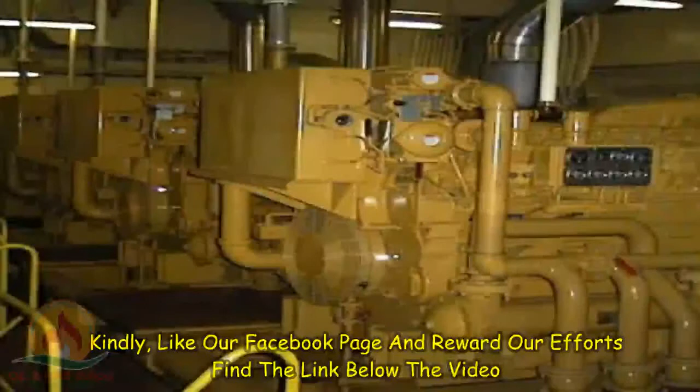There are three basic ways a rig distributes or transmits power: an AC to DC power system, or SCR power system, a DC to DC power system, and a mechanical power system.

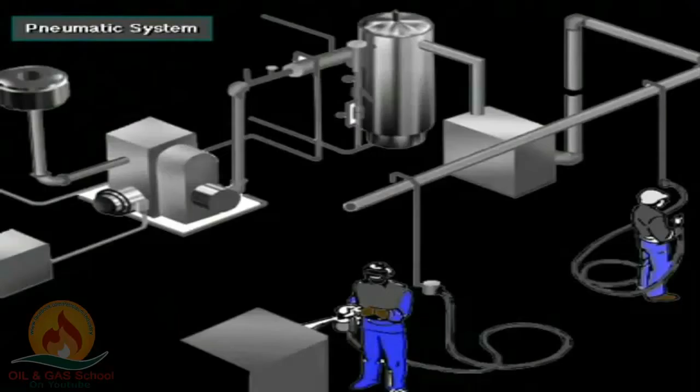At the heart of every rig power system, whether electrical or mechanical, is the prime mover, the rig's main source of power. Most rigs have more than one prime mover, and prime movers are almost always large internal combustion engines. Some equipment on the rig requires hydraulic power and pneumatic power. The rig's hydraulic and pneumatic systems also obtain their power from one of the three basic distribution systems.

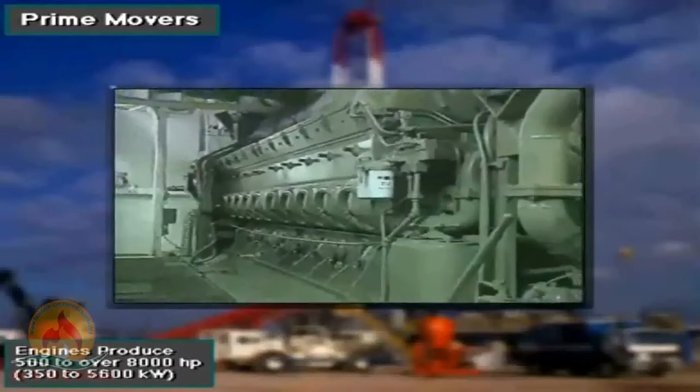Large diesel engines are the main power source, the prime movers for most rigs. These engines often produce from 500 to over 8,000 horsepower, or 350 to 5,600 kilowatts. Rig builders usually house several engines together to drive the rig equipment. They also keep extra engine sets available for backup operations.

Most rig engines are diesel because, unlike gasoline engines, they can produce a lot of power when running slow. Also, diesel fuel is not as volatile as gasoline, so it's safer to use, transport, and store.

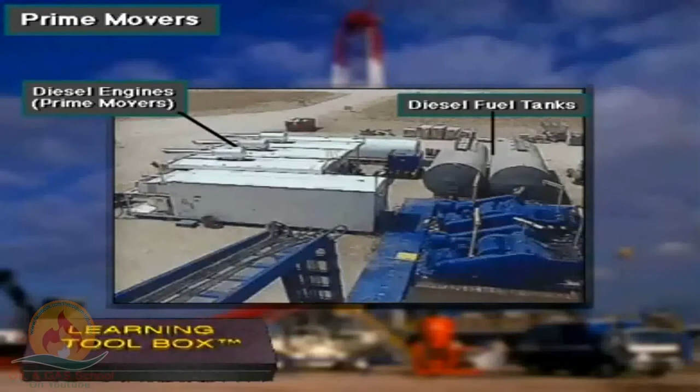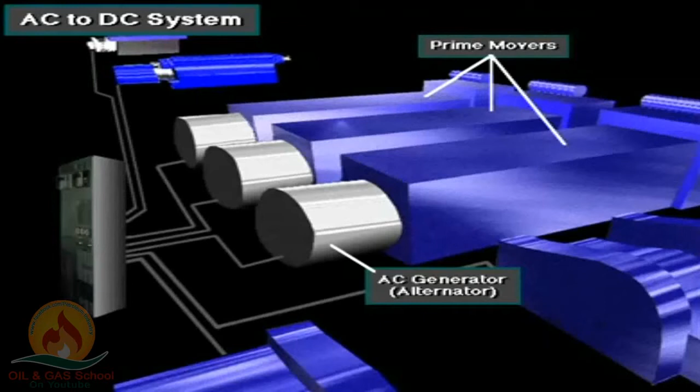Here's an AC to DC power system. The prime mover, usually a diesel engine, supplies power to the AC generator, also called an alternator. From the AC generator, AC current is sent to the SCR, the silicon-controlled rectifier. An SCR is a high-tech solid-state electronic device.

The SCR converts AC to DC current, which drives the heavy rig equipment, such as the mud pumps, the drawworks, and the rotary system.

Auxiliary loads, such as small pumps and rig lighting, need lower voltage AC power, so a transformer steps down or reduces the voltage to the rig's auxiliary electric equipment.

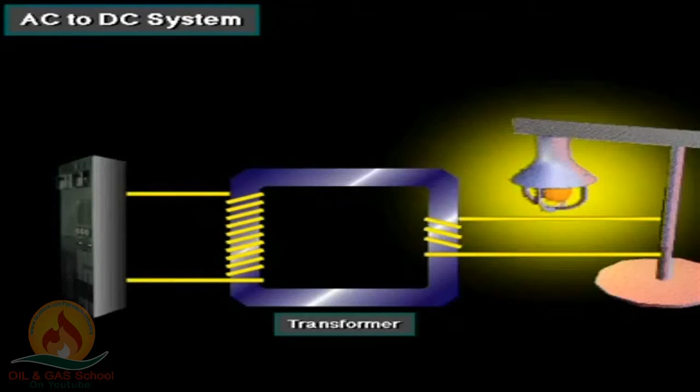The DC motors power the mud pumps, the drawworks, and the rotary system.

A smaller AC generator is also part of the system. It supplies AC current for equipment that works best with this current type. For example, a chemical mixing pump requires AC power.

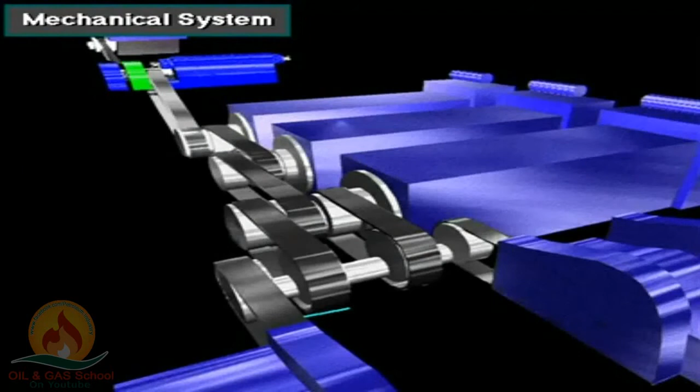Here's a mechanical rig system. Mechanically powered rigs are usually smaller than those rigs which use electric power.

The prime mover drives a mechanical compound transmission, which in turn powers the drawworks, the rotary table, and the mud pumps.

Auxiliary loads, such as small motors, are supplied with AC from an alternator connected to the prime mover.

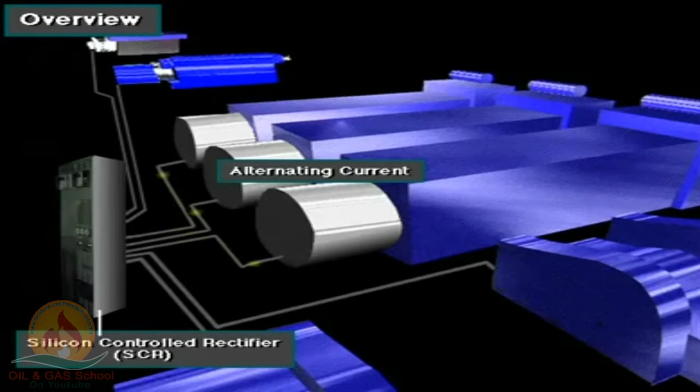Alternating current put out by the AC generators goes through heavy-duty electric cables to a special device called a silicon-controlled rectifier, or SCR. The SCR converts AC to DC.

Other heavy-duty electric cables carry DC electricity to the DC motors. The DC motors convert electrical energy back into mechanical energy to drive the powerful hoisting, rotating, and circulating equipment.

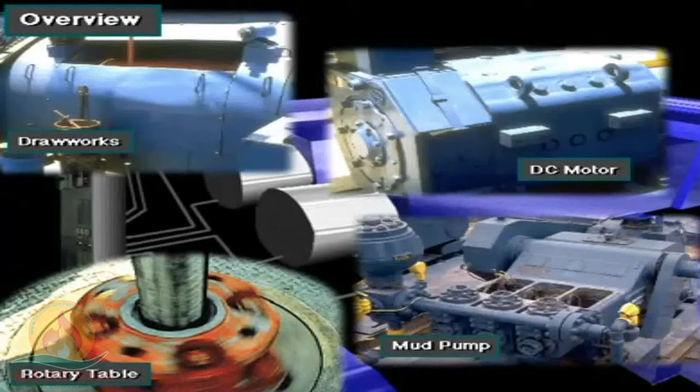Rig owners like to use AC generators because they can be built to be very powerful for their size, which is an advantage over DC generators. Also, rig equipment can distribute AC easier than DC.

But direct current has certain advantages when driving large equipment. Mainly, DC motors produce a lot of torque at low speed that the drillers can easily control.

Using remote switches on his console to control the SCR control panel, the driller can select and deliver the power from the various generators wherever it is required.

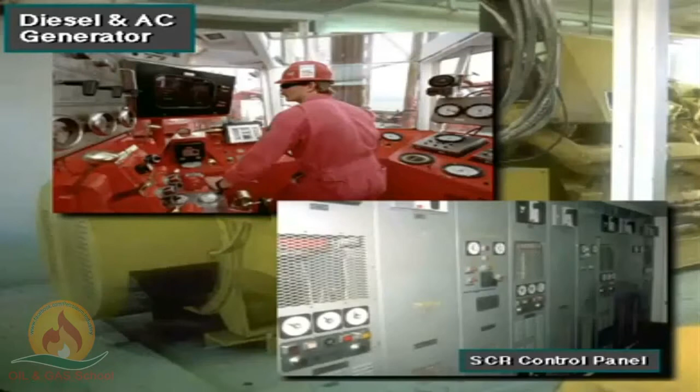But some AC generators power big motors. In fact, most of today's diesel-electric rigs use AC generators in a system called an SCR power system.

Here, a large AC generator, an alternator, is connected to the diesel engine prime mover. As the engine mechanically drives the AC generator, the generator produces alternating current, or AC electricity. AC is like the electricity used in most cities and homes.

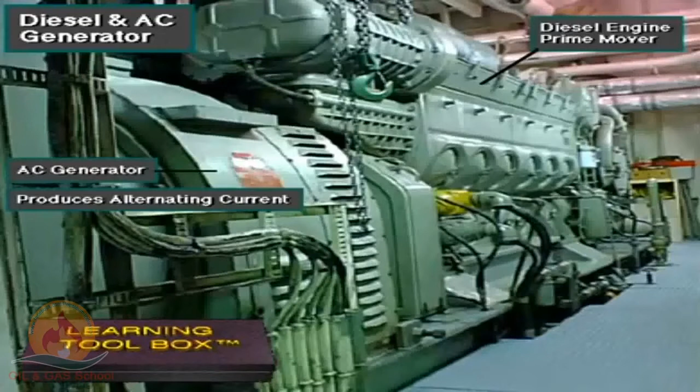Equipment in this electrical cabinet converts, or rectifies is the electrical term, most of the AC current produced by the AC generators into direct current.

As mentioned before, rig owners usually prefer DC current for driving the very large equipment that requires precise variable speed control and high torque. The control equipment includes solid-state electrical components called silicon-controlled rectifiers, or SCRs.

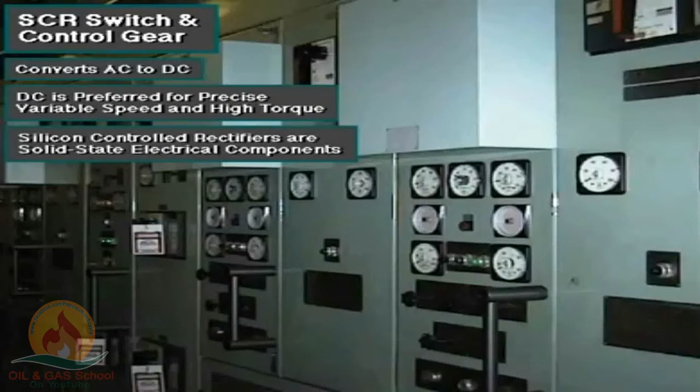Heavy-duty electrical cables come out of the cabinet and carry DC electricity to the powerful motors driving the circulating, hoisting, and rotating equipment.

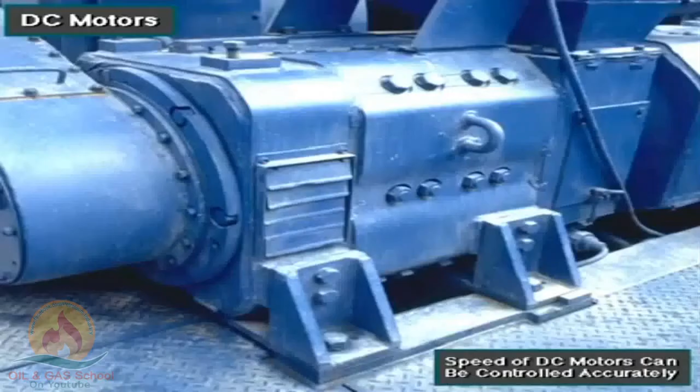Usually, large DC motors supply power to the mud pumps, the drawworks, and the rotary table or top drive. Sometimes the drawworks mechanically drives the rotary table, but on some rigs the rotary table has its own motor.

The driller can control the speed of a DC motor very accurately, which is why rig owners use DC instead of AC motors. With accurate speed control, the driller can accurately set the speed the drawworks lifts, the mud pump operates, and the rotary table turns on rigs without a top drive.

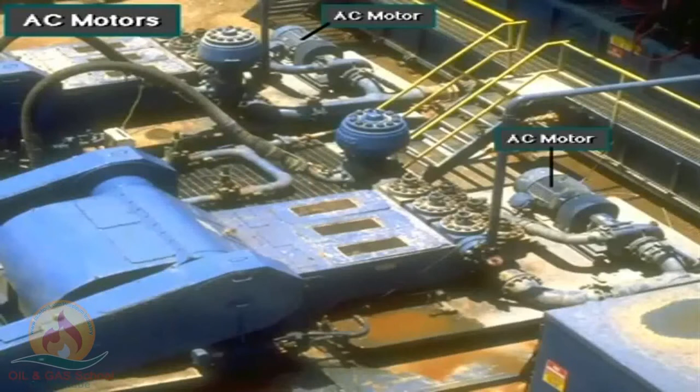Various small components on a rig need power too. For instance, these two centrifugal pumps move mud from a tank to supercharge the intake of the mud pumps. In this case, it's more efficient to use small motors to power the centrifugal pumps rather than using the prime movers, hydraulic fluid, or air.

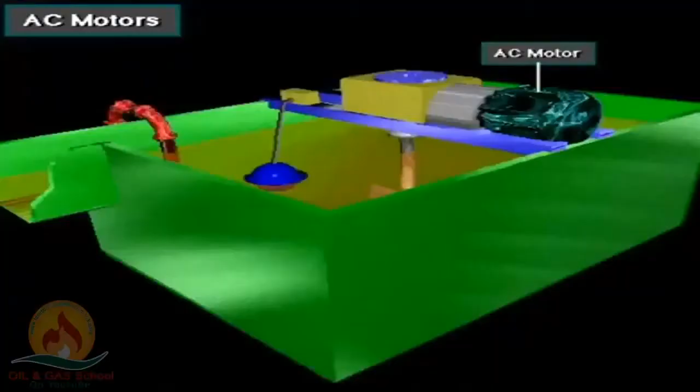Here's another AC motor. It powers the paddles on the mud agitator in a mixing tank. AC motors generally power equipment that does not require a lot of horsepower, so they vary in power from less than 1 horsepower, or 0.75 kilowatts, to more than 150 horsepower, 110 kilowatts.

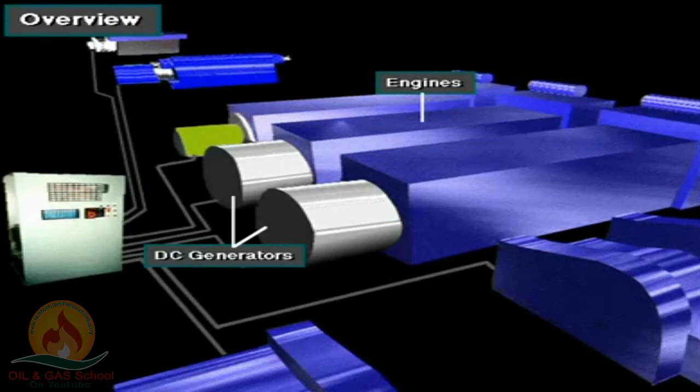For electric power distribution, some rigs use DC to DC power. DC to DC was the first electric power system. In a DC to DC system, each engine drives a DC generator. The DC generator converts the rotating mechanical energy of the diesel engine into DC electricity. Heavy-duty electrical cables carry DC electricity via the control panel to large 1,000 horsepower or 750 kilowatt DC motors.

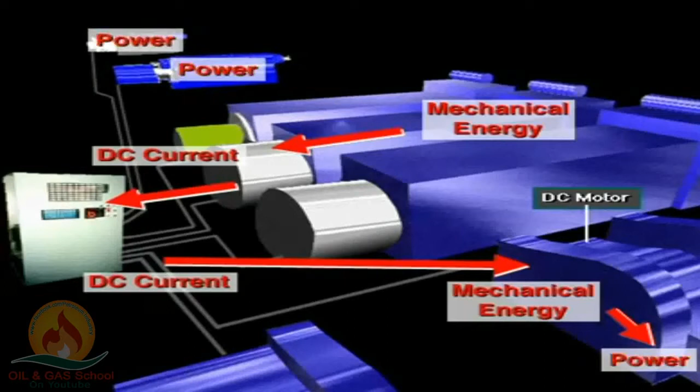The motors convert the electricity back into mechanical energy. This mechanical energy powers the hoisting, rotating, and circulating equipment. For large equipment, most rig owners prefer DC motors over AC motors.

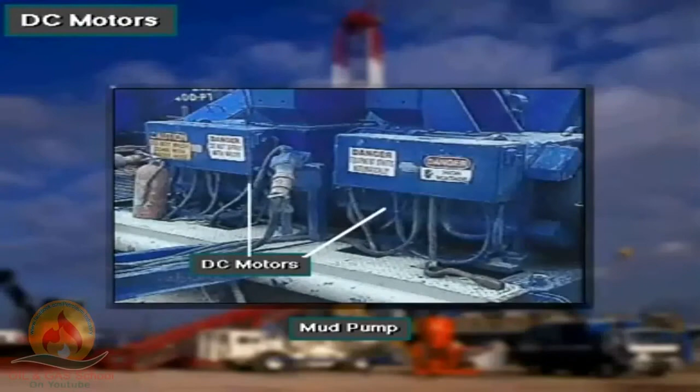DC motors put out high torque, twisting force at low speed. Further, the driller can easily control the torque from his console on the rig floor. Keep in mind, though, that recent technological advances are allowing computerized controls and variable speed AC motor drives to be used where only DC motors were used in the past.

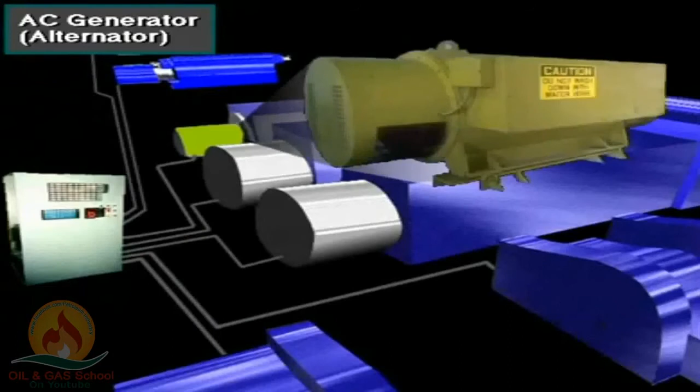This is a generator, or alternator, on a DC to DC rig. It generates the AC electricity that DC to DC rigs need. The alternator powers smaller equipment on the DC to DC rig, like the small AC motors on centrifugal pumps, air conditioners, lights, fans, water maker units, and other small equipment.

Mechanical drive rigs normally compound or connect two or more engines to drive the main pumping, rotating, and hoisting equipment. Generally, small to medium-sized land rigs use mechanical drives.

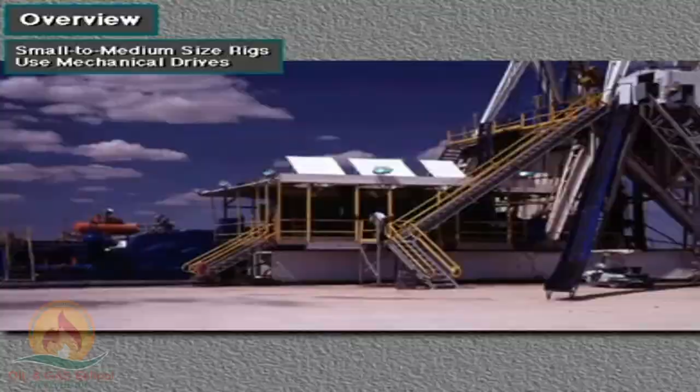They use clutches, converters, chains, shafts, belts, or compounding transmissions to connect the prime movers to the driven equipment.

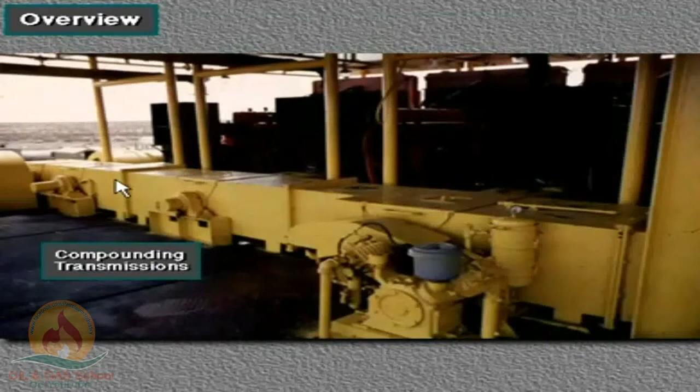Here's a common way to get power to the components on a mechanical drive rig. This shows 3 engines that the rig owner compounded. That is, the power from each engine goes through a series of sprockets and chains in a housing, called a compound. The compound transfers engine power to the drawworks, the rotary table, and the mud pumps.

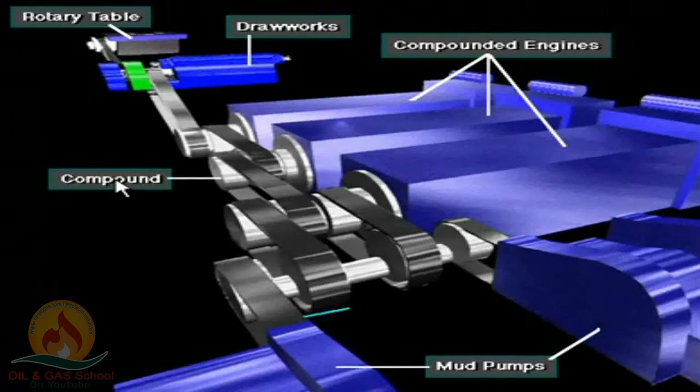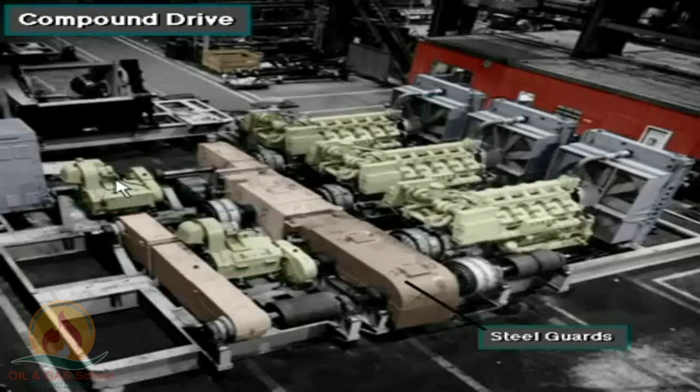In a compound drive, engine power usually goes through torque converters to the sprockets and chains. Steel guards cover the sprockets and chains, removed here so you can see them. Torque converters smoothly transfer engine power to the compound. Here, you can see the steel guards covering the machinery in the compound.

Not only do the guards protect personnel, they also keep a lubricating oil spray confined to the chains and sprockets. Also, note that large V-belts, called power bands, drive the mud pumps. Steel shrouds also guard them.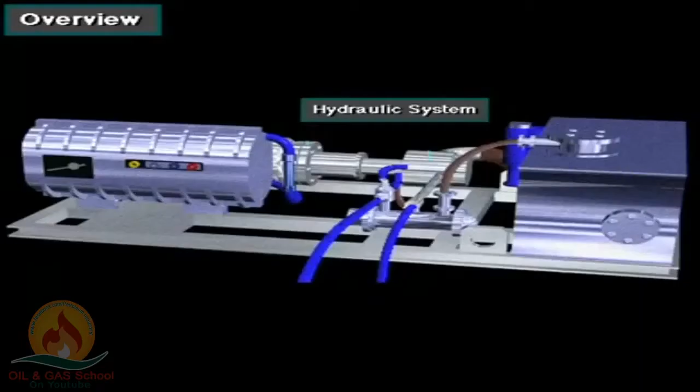Many tools use hydraulics to transmit power. Examples include the Kelly spinner, the iron roughneck, and casing tongs.

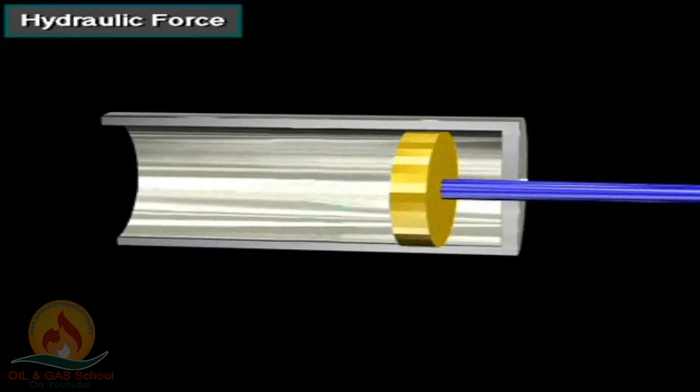Hydraulics is a means of transmitting power by pushing on a confined liquid. Here's a piston moving inside a cylinder. Hydraulic fluid fills the cylinder to the left of the piston. The piston's surface area is 10 square inches. If a pump puts 1,000 pounds per square inch, or psi, of hydraulic fluid pressure on one side of the piston, this 1,000 psi acts on the 10 square inch piston to produce 10,000 pounds of force. That's a lot of force available for powering certain tools and equipment.

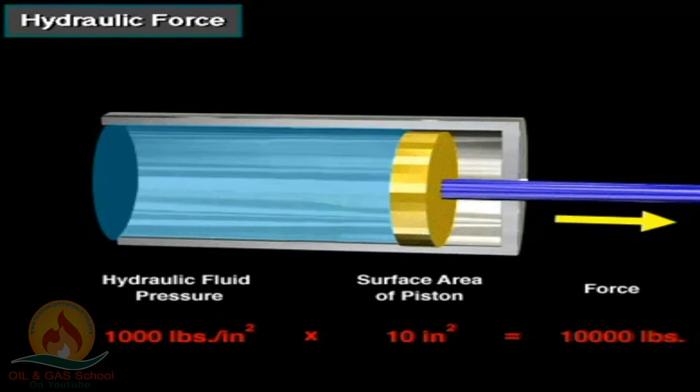The fluid returns to the reservoir after it passes through the Kelly spinner or other tool. The hydraulic power pack is a closed system. The fluid is used over and over.

Certain controls, valves, and tools on the rig are air or pneumatically operated. For instance, the driller uses pneumatic controls on the driller's console to engage and disengage clutches on equipment like the drawworks.

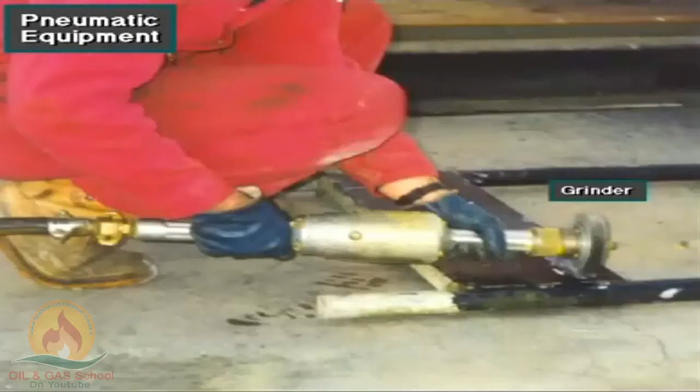The rig crew may use air-powered hand tools, like a grinder. They also use an air hoist, an air-powered winch, to hoist and move relatively light equipment onto and around the rig floor.

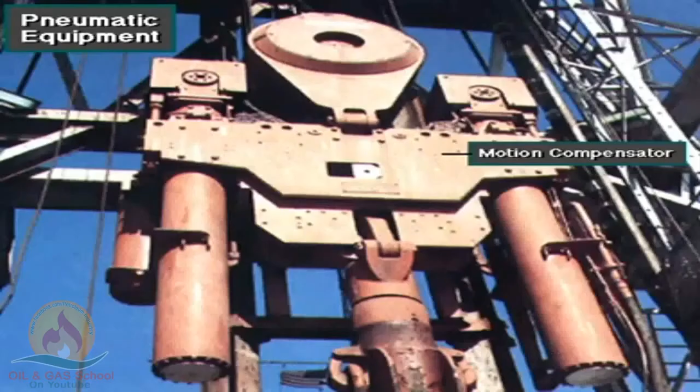Many diesel engines on rigs have an air starter, which is an air-operated motor that turns the engine crankshaft over to start it. Finally, a floating rig's motion compensator operates on large amounts of compressed air to compensate for vessel heave while keeping the drill string in position.

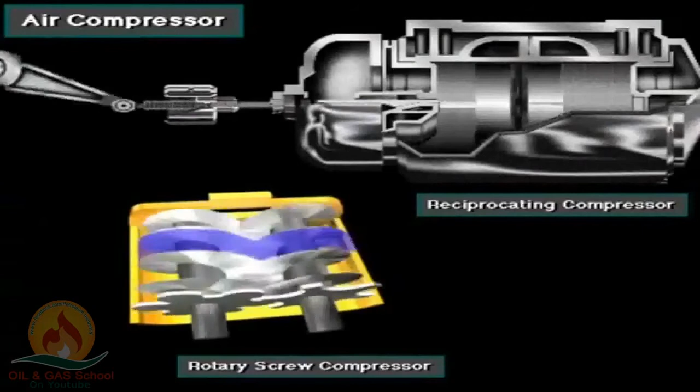An air compression system provides air pressure to operate the pneumatic controls, valves, and tools on the rig. Rigs use rotary screw compressors or reciprocating compressors to compress air. A typical reciprocating air compressor has 2, 3, or 4 pistons moving inside cylinders.

The compressor takes in air from the atmosphere and raises its pressure, that is, compresses it. The volume tank stores a given amount or volume of compressed air that is ready for use when needed.

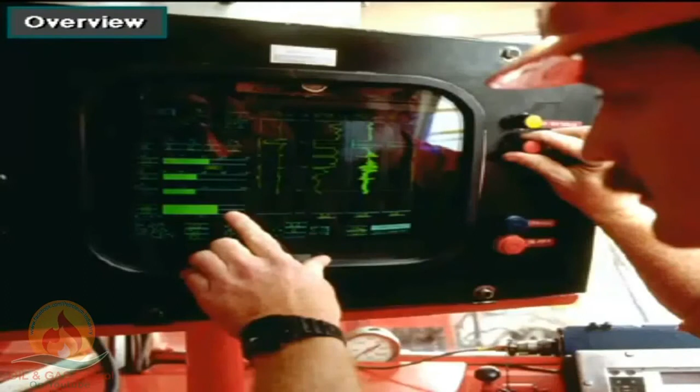A drilling rig has many instruments and gauges. They help the driller and other crew members keep track of the drilling operation. Rig instruments vary from the most basic to sophisticated computers with video displays. Here, we'll cover the basics.

The driller's console is the driller's workstation on the rig floor. It has several instruments and gauges. All of them help drillers track the drilling process and keep them informed of the situation.

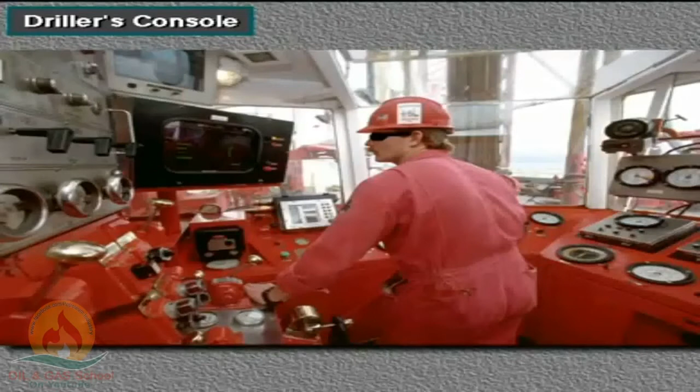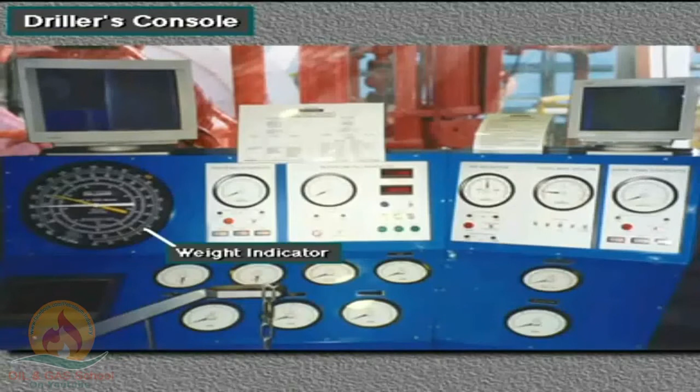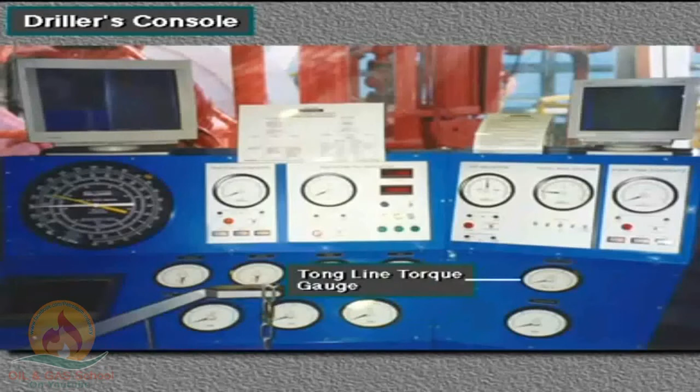Indicators and gauges on the driller's console include the weight indicator, the pump rate indicator, mud pump pressure gauge, rotary tachometer, rotary torque gauge, tong line torque gauge, mud return mud flow rate indicator, mud tank level indicator, and trip tank volume indicator.

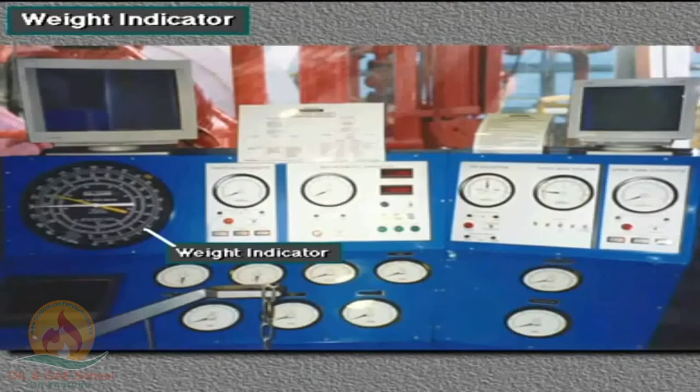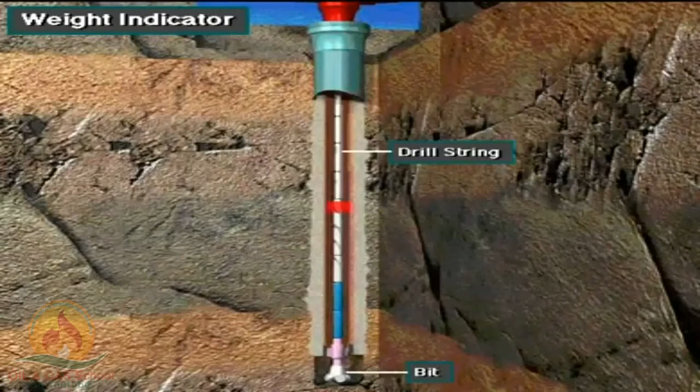The weight indicator is the largest gauge on the driller's panel. It indicates the hook load and weight on the bit. The hook load is the total amount of weight hanging from the hook. Weight on the bit, or WOB, is the amount of weight put on the bit by the drill string. It is less than the hook load.

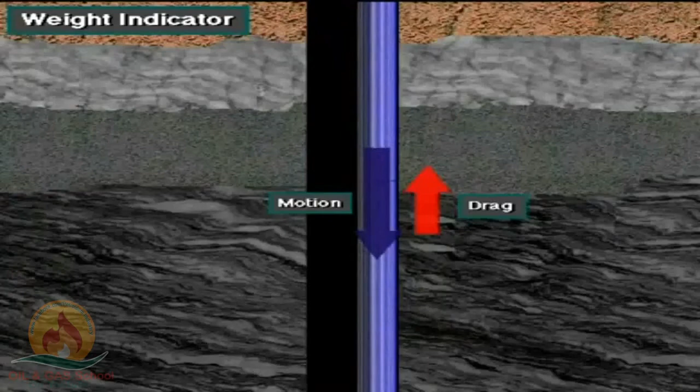The weight indicator is extremely sensitive to hook load changes. Drillers can use hook load changes to monitor the amount of drag or friction the well bore puts on the drill string when they move the pipe up or down. Or, because it is so precise, the driller can use it to monitor the operation of downhole tools requiring small variations in weight.

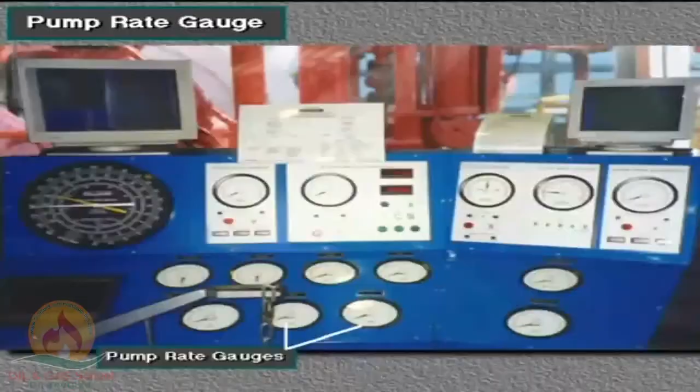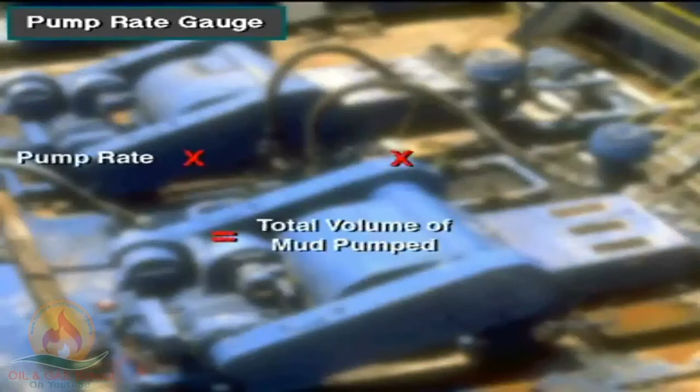The pump rate gauge shows the number of times one mud pump piston moves per minute. This console has two pump rate gauges because the rig has two mud pumps. The driller can determine the total volume of mud being pumped by multiplying the pump rate by the number of pistons in the pump times the amount of mud each piston pumps.

The mud pump pressure gauge shows drillers the amount of pressure the pump is putting out. They monitor pump pressure from the standpipe to ensure that it is the correct amount needed to keep the hole clean and return cuttings back to the surface.

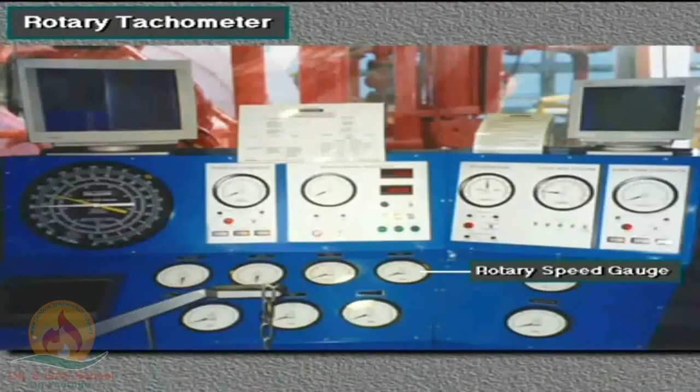The rotary tachometer shows the revolutions per minute, or RPM, of the rotary table or top drive unit. Drillers monitor rotary RPM because they need to know the rate the bit is turning. Different bits rotate at different RPMs. RPM ranges for a bit are specified by the manufacturer.

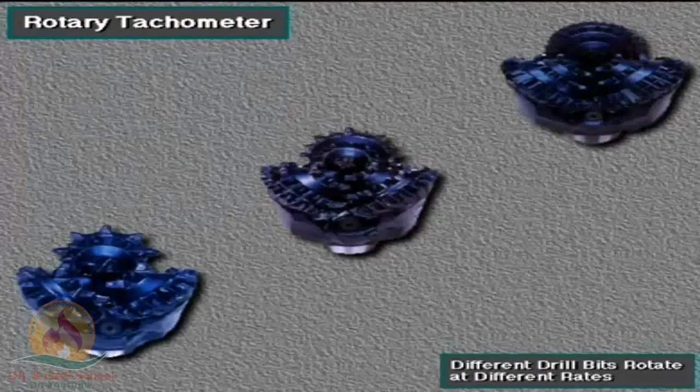Drillers use the rotary torque gauge to see how much twisting force, or torque, the rotary is applying to the drill string. Knowing rotary torque helps keep drillers from parting the drill string because of too much rotary torque. Parting the drill string in this manner is called twisting off.

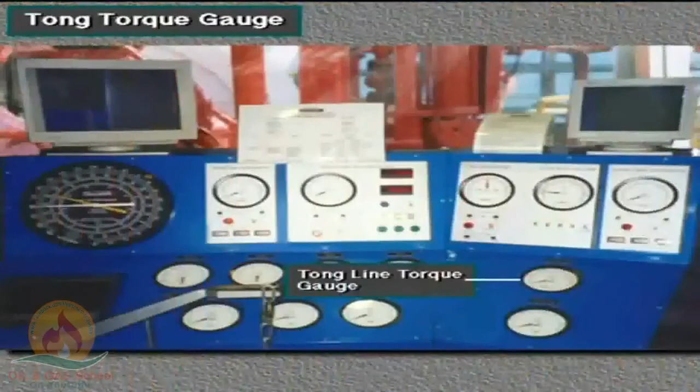A tong torque gauge helps the driller and the rotary helpers make up the drill pipe and drill collars with the right amount of torque. Too little torque, or tightness in the connection, may leak or unscrew while drilling. Too much torque can damage or gall threads, which cause them to leak and eventually to come apart.

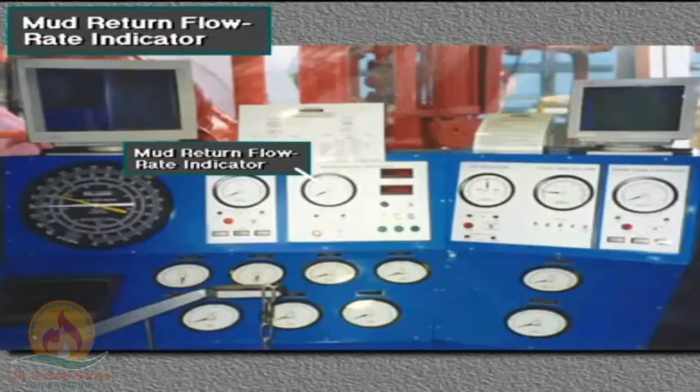Drillers use the mud return flow rate gauge as a relative indicator of how much drilling fluid is returning at the flow line. The sensor is mounted in the mud return line, the flow line.

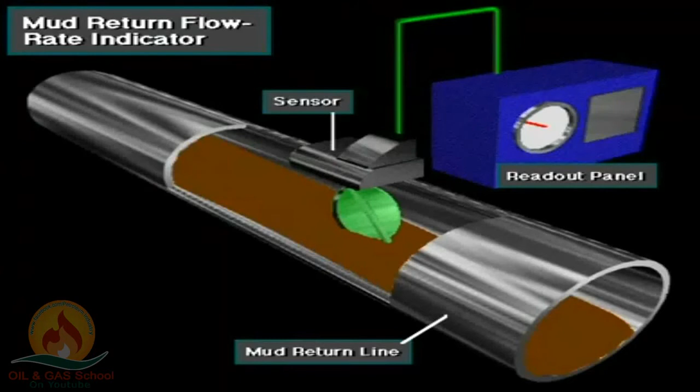A paddle inside the return line moves as mud flows past it. As the paddle moves, it sends a signal to a readout panel mounted in the driller's control console. The driller sets the readout so that as long as return flow is normal with constant pump speed and output,

no alarm sounds or lights up. However, when the return flow rate changes, increases or decreases, the paddle's motion also changes. This change in paddle motion sends a signal to the driller's readout and sounds or illuminates an alarm. A change in the return flow rate of the mud may indicate one of two things.

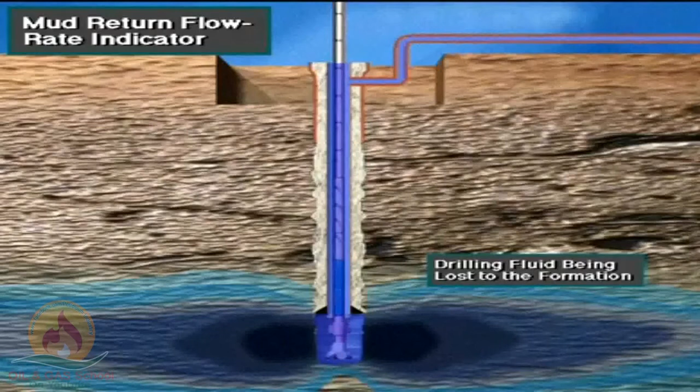If the flow rate decreases, mud may be being lost to a downhole formation. If the flow rate increases, formation fluids may have entered the hole and are forcing drilling mud out. So, a mud return flow rate indicator can help drillers detect kicks and loss of circulation.

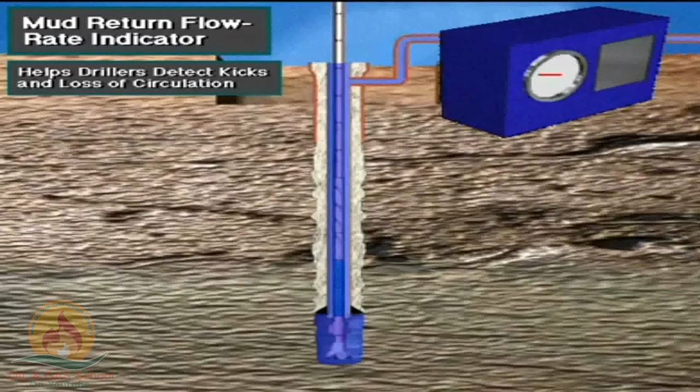This mud tank has a special float in it. It goes up or down as the mud level in the tank rises or falls. Usually several mud tanks have floats in them. The floats send a signal to a digital totalizing panel mounted on the driller's console.

This panel takes the tank level signals from all the floats in the tanks, totals them, and sends the information to the chart recorder next to the panel on the rig floor, close to the driller's console.

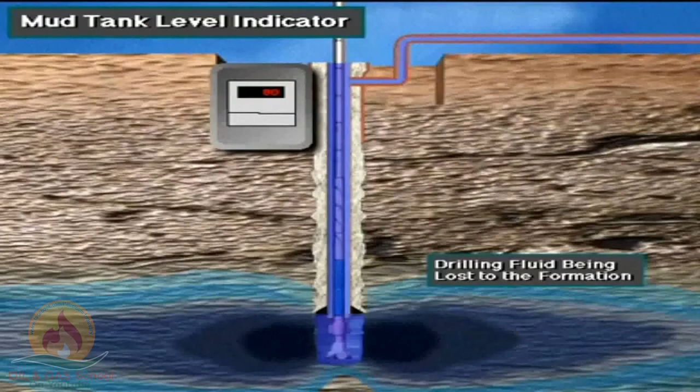If the level of mud in the tanks falls, and no one has removed mud from the tanks, then it is likely that mud is being lost to a downhole formation. If the level of mud in the tanks rises, and no one has added mud to the system, then it's likely that formation fluids are flowing into the well. Thus, a mud tank level indicator is another tool to help the driller detect kicks and loss of circulation.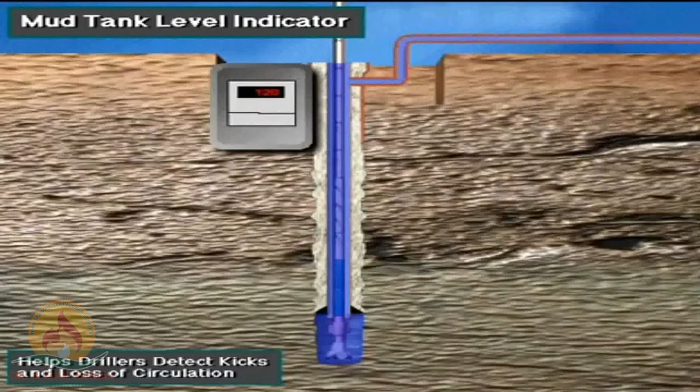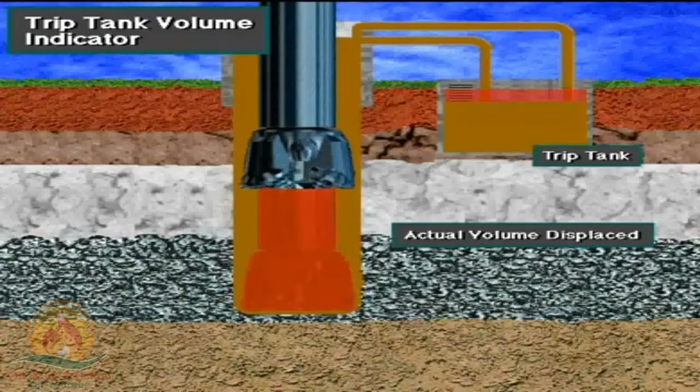A trip tank volume indicator helps the driller monitor the amount of mud being displaced by the tubulars or wire rope being run in and pulled out of the hole. Crew members calculate tubular displacement before each trip using tables from a handbook. Then, during a trip, they compare the calculated volumes to the actual displacement. Close monitoring of the trip tank during trips is crucial to proper well control.

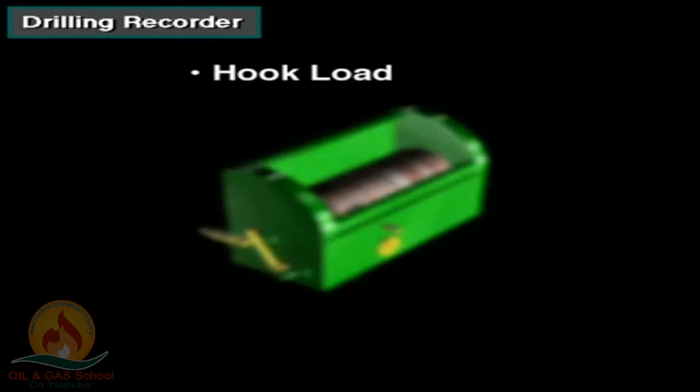A drilling recorder makes a record of drilling variables, such as the hook load, weight on bit, rate of penetration, torque, pump strokes, and pump pressure during drilling.

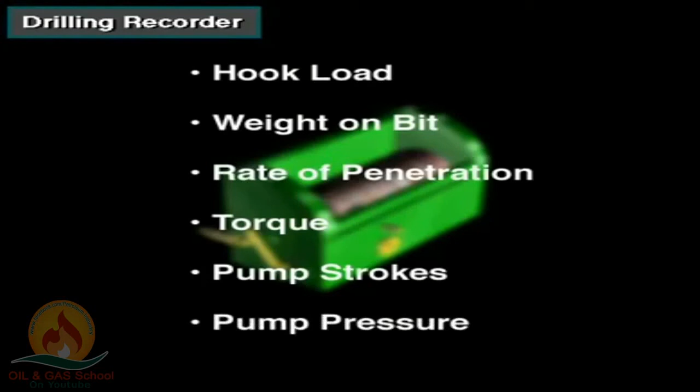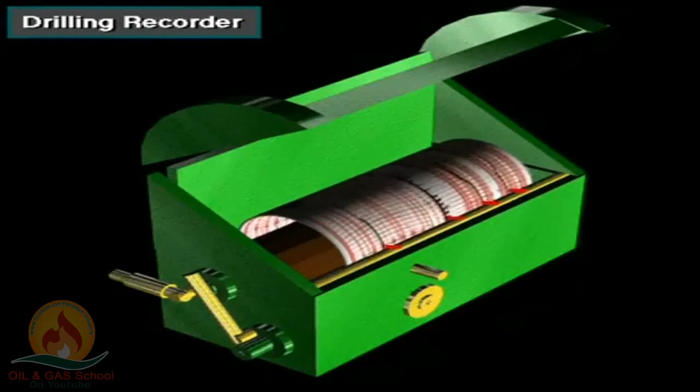It's usually located in the doghouse on the rig floor. The driller puts a chart onto the revolving drum. Several pens with ink in them trace records onto the chart. Drilling recorders may have from one to several pens, depending on how they're hooked up.

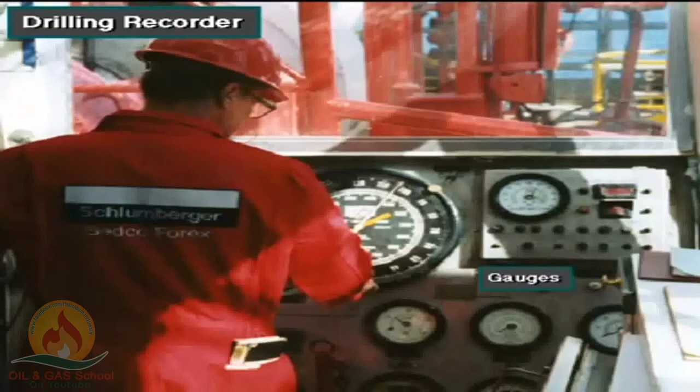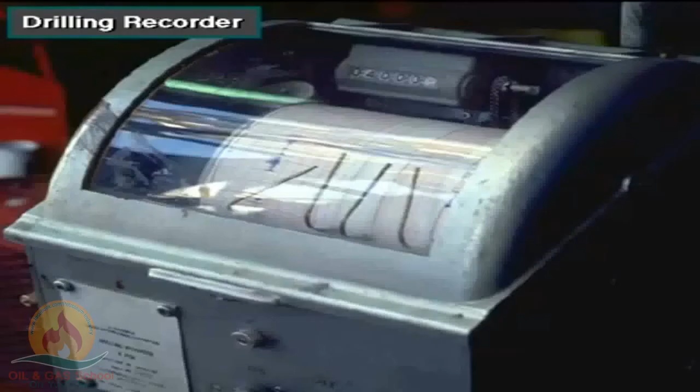The recorder gets signals from sensors mounted near the gauges that measure the drilling variables. For instance, a load cell on the deadline anchor senses hook load and weight on bit. Here's a photo of a drilling recorder. Note that it has a hinged plexiglass cover that drillers can raise to change the chart when necessary.

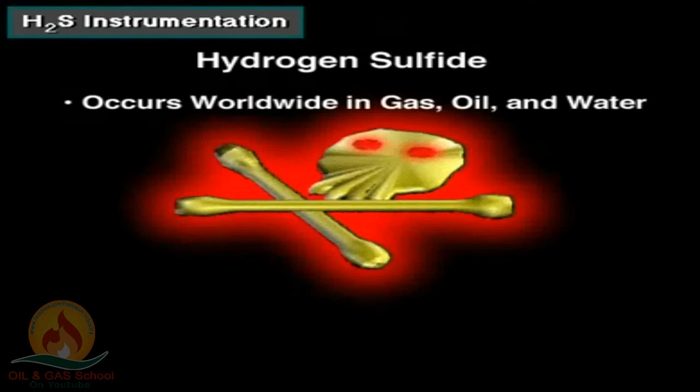Hydrogen sulfide, H2S, or sour gas, is the most poisonous gas encountered in drilling operations. It occurs worldwide in various concentrations associated with gas, oil, and water produced from wells. It is extremely toxic, explosive, and heavier than air.

It is also colorless, so you cannot see it. In low concentrations, it smells like rotten eggs. But you cannot depend on your sense of smell to escape harm. H2S quickly deadens your ability to smell.

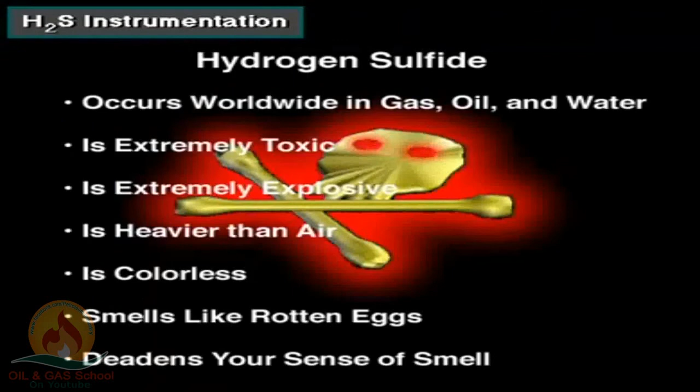Where H2S may be present, rigs are equipped with sensors, automatic monitors, and alarms. This is an audible and visual H2S alarm. The horn sounds a siren, while the light flashes brightly if they're activated by H2S sensors placed on the rig.

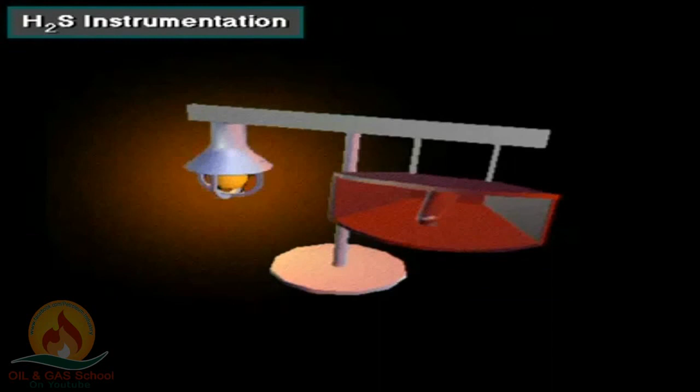This H2S sensor is placed near the mud tanks. Others may be at the bell nipple on the rig floor, shale shakers, flow line, rig accommodations air intake, and other places on the rig.

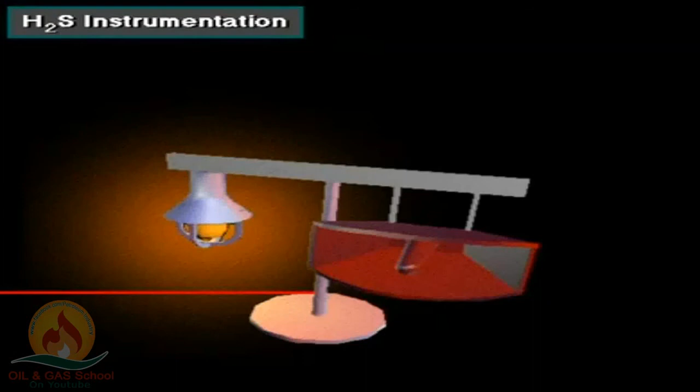When a sensor picks up H2S gas above a predetermined level, the monitor triggers both the visual and audible alarms. Upon hearing or seeing the alarm, crew members can take action to avoid injury or death. You will receive detailed H2S training if your rig is working in an area where H2S may be encountered.